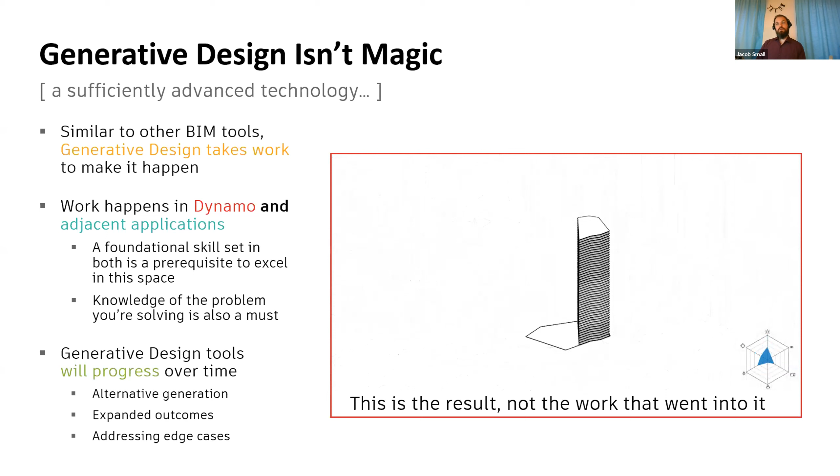So keeping that foundational skill set in terms of how to build and manipulate Dynamo graphs is really, really important because you're going to have alternative generation methods come up, expanded outcomes. Hey, this job cares more about this than the last one that cared about that. So let's figure out how to calculate this thing, and addressing edge cases that might come up.

What if your site is super narrow and therefore none of the offsets that you're using before work because we've got these crisscrossing polygons? How are we going to deal with that stuff? So all of this stuff does take some work.

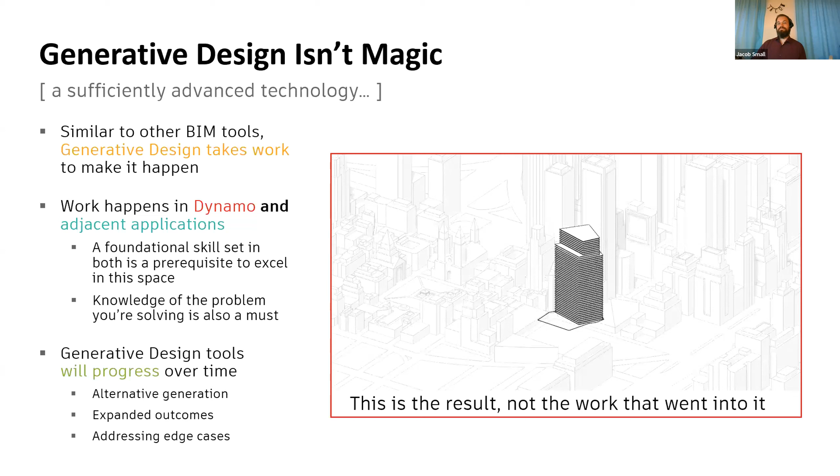But we wanted to make sure that we had an idea about how to get started with a generative process. And that's why we brought Lilli in today. She's an absolute expert in this piece. So Lilli, I'm going to turn it over to you. I'll be flipping through the slides, but we're going to go ahead and talk about how to get started with generative. Great, thanks, Jacob.

I think a couple of weeks ago when the first generative design talk was, I was bouncing around in Europe, did some traveling over there. So hi to my friends in Amsterdam and Germany. I love your cities, they're fantastic. And never been to Copenhagen, but it's on my world bucket list.

So I have a background as an architect, and I have been working on this problem of generative design with Jacob and Sol and others for a couple of years now. I know last session, John gave you a great overview of looking at some problems with laying out some trees and how you could use that in Dynamo Player, and then how you could transition to using that in generative design. I think that was a great intro to these tools.

We'll repeat some of what he went over last week, but we're really gonna go through some concepts on what do you need for a generative design study, and how do you start to go about it? And I would say first that the process really isn't super different from what you might do as a traditional designer, right? So you need to understand the problem that you're going after, define it very clearly, decide ways to measure success, think about how you're going to review the results. And so you're working with people, right? Figuring out what the parameters are for your design problem.

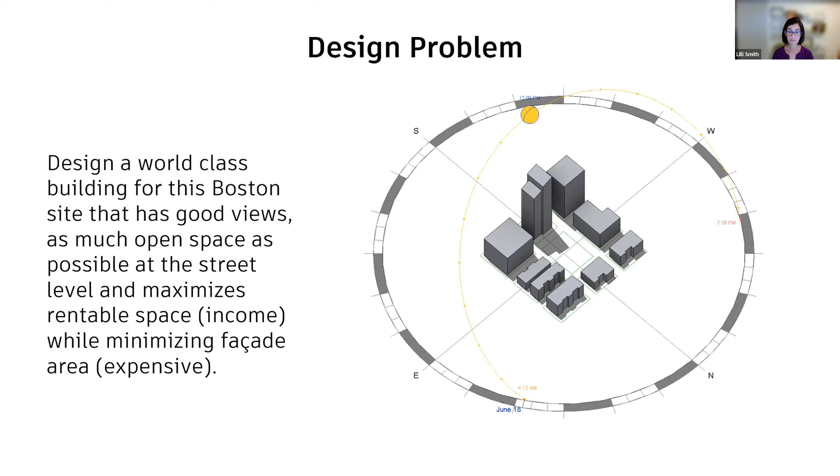And it also minimizes the amount of facade that we have because the facade materials are really expensive. Maybe they are things that have a lot of embodied carbon. We want to minimize them. So that's our design problem. And if you go to the next slide, we've done some work in figuring out how we're going to approach this problem already. And we have a notion of this tower here.

And I'm just going to describe the basic way that we're thinking about how to shape this tower. So we have different parameters that are going to shape this mass in different ways. And this is just a specific design that we came up with because we liked how these angles worked in this site. And so there were some design decisions that we made.

So if you go just one click forward, Jacob, you can see the black line that we showed was the site. Then this is our first idea of the massing, and this blue dot is moving back and forth on the site, and it's bringing it back to make more resultant green space. You can see the green space in the model there on the right. So that's our first parameter. We'll see how that's working in Dynamo.

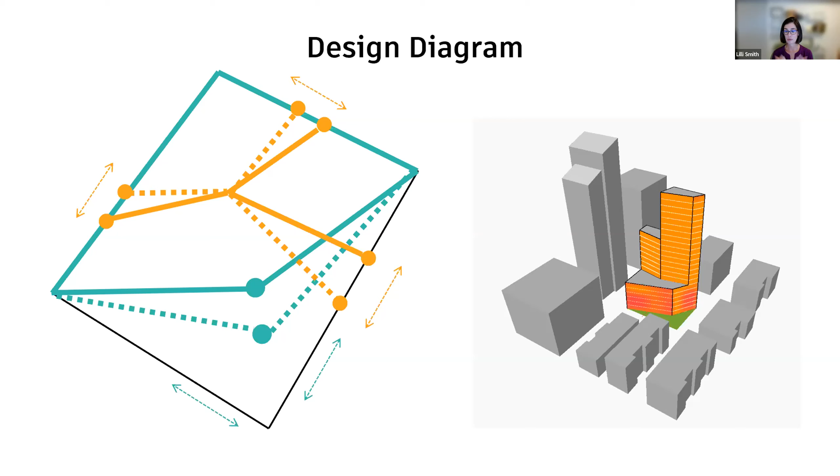And then another layer on top of that is how we're going to split up the towers. So again, we have these points moving back and forth on a derivative of the site lines, and they're breaking up this form into these three towers that are a critical part of our design, and we're going to investigate what we can do with them.

Okay, so these are the summary of our parameters that we're going to vary in the study. So we have the heights of the towers. We have the corner point in the open space that we showed, that was the blue dot. And then the splitting location, the orange dots. And all of those parameters are going to be in our model as inputs.

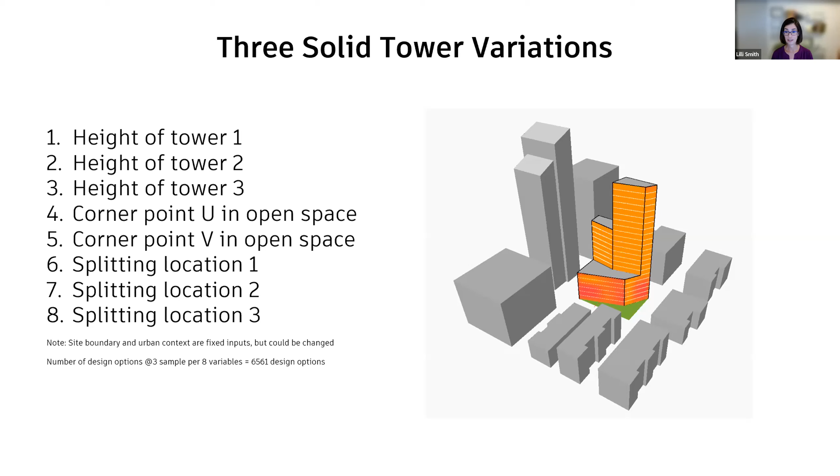But if we take all of these 8 inputs and we just sample 3 different choices on each one of them, that works out to 6,561 different design options. So you can go to the next slide. So we can use the computer to generate a lot of design options. If we set it to more than 3 samples for each of those variations, it would be even more.

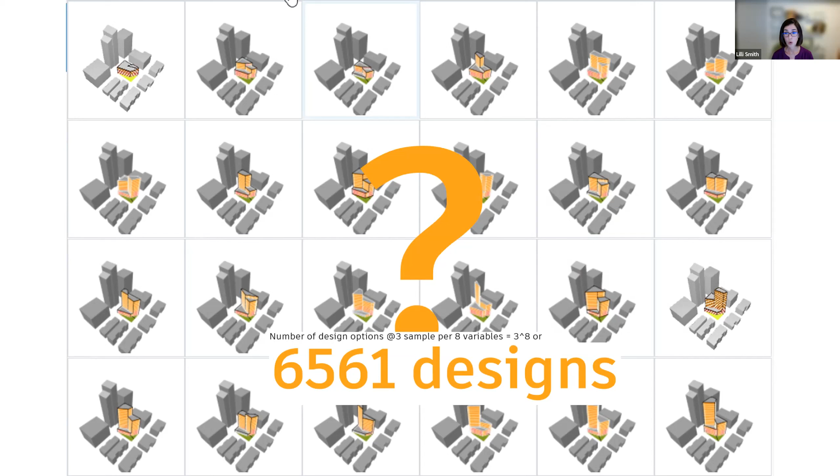But how does this really help us, right? Are we really going to go through all of these, and how are we going to make these choices? So the critical second half of the problem here is that we need to have some metrics, some goals that we can use to help sort through these results. And I would posit that there are really 3 different types of measurements that we could do here.

There's things with simple math. So in our goal of having as little surface area as we can, we can measure that pretty easily in Dynamo, because there's a surface area node that we can measure the surfaces with. We can add them all up.

We can look at the heights and do some analysis with them with some pretty simple math. We can also use more complex nodes, things like solar radiation or some view analysis that uses rays that are going to measure how far it is to a different building. We could use those for more complex analysis.

And then, of course, there's always going to be things that are not measurable that are going to factor into this, such as beauty, personal preference, aesthetic sensibility. And some of those things we have already kind of made design decisions on in how we've set up this parametric model. And we can evaluate the results based on our own designer's intuition after the fact as well. But as much as you can put things into math, it's going to help you to sort through them. And we'll show an example too of how you can try to start to put some of these preferences into math. So yeah, you can go forward, Jacob.

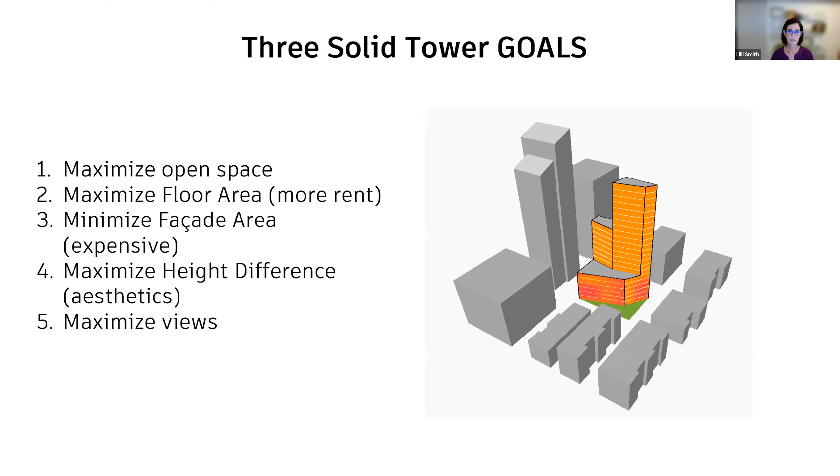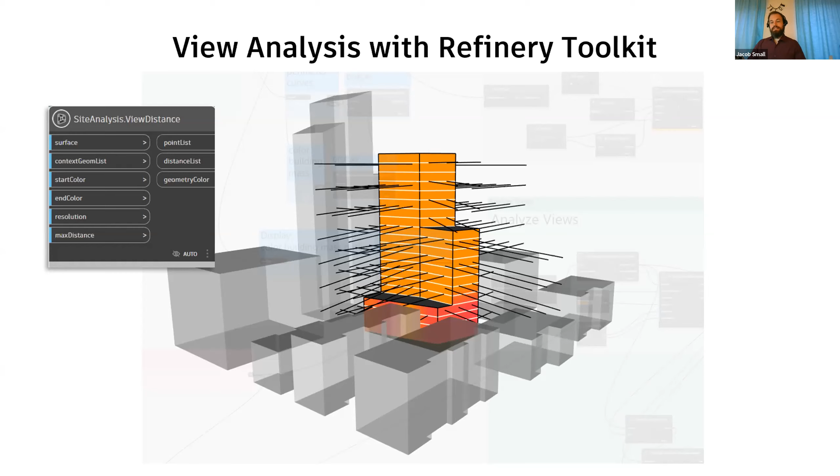Okay, let's see, what's the next slide that we got? Next up, we go to the demo. Okay. Yeah, so cue the danger music.

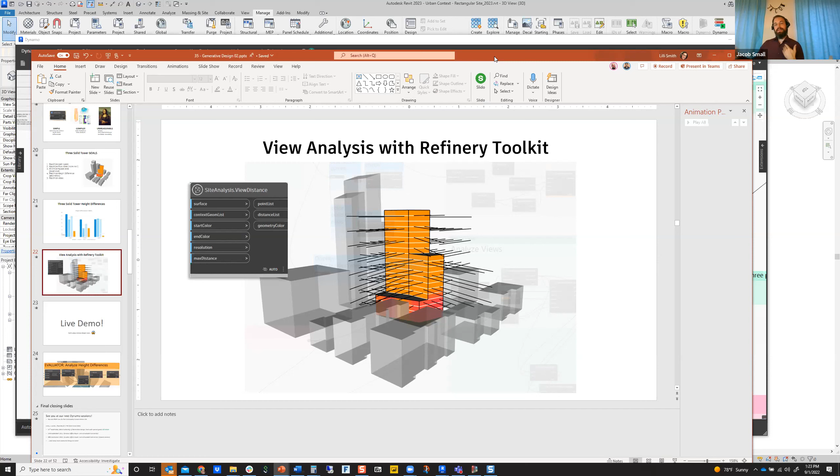And while we work on switching over the screen share, I'll stop my sharing so you can pick up. I just wanted to talk in particular about the view metric, as Lilli mentioned early on, that's one of those more complex evaluations. So a lot of times you wind up having to deal with more abstract concepts in order to make it work. And it really helps out sometimes in terms of wrapping your mind around how that concept is working to do stuff like visualize those vectors of the views from the points to figure out what that means about the view direction from the given piece of the surface. So really glad to see that in there. Great add, Lilli.

Yeah, and so as we go, I'm going to show you this model that we've made and how it works as a parametric model, and then how to turn it into a generative design study, so that you can start to get those 6,000 or however many options, and also how we can measure some of the results.

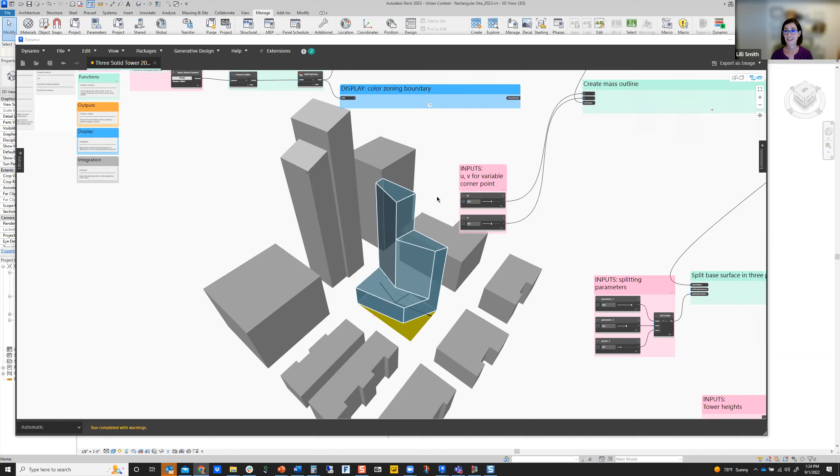So, Jacob and Sol, feel free to jump in if anything doesn't make sense or you want to add color. That would be great.

So the first thing about this model, and I think we can probably post this model if people are interested in trying it out themselves. There's a lot of good learning in this model. You guys can help figure out where to post this.

So the first thing is just to understand what you're going to see in this graph. We have these different sections with different color codes. We like to use pink for inputs. The functions are all in these green groups. Our outputs are going to be in orange groups. We have display functions, so turning on different parts of the model, in blue. And then integration, like writing stuff back into Revit, is in these gray groups.

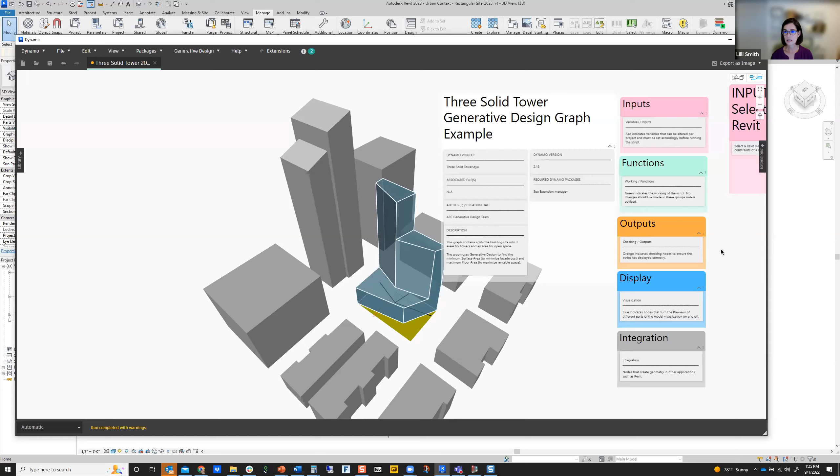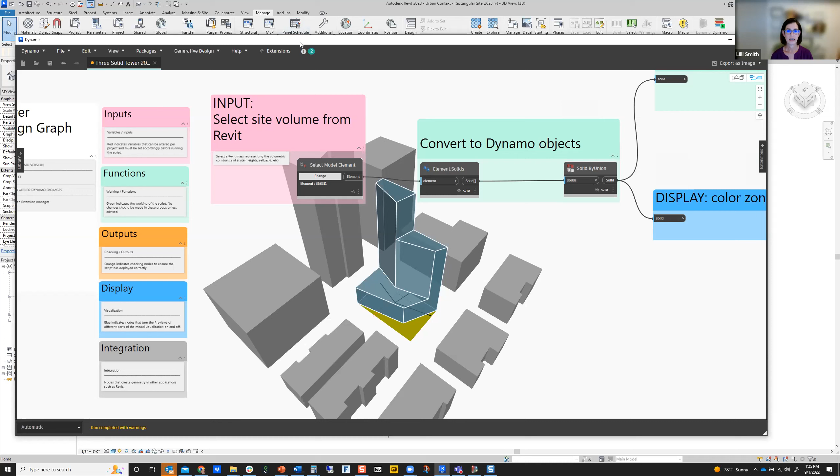Okay, so first let's look at how this parametric model is made. I explained some of it with my silly PowerPoint diagram, but just to show you how this works. First we're getting this site input from Revit. You can see down here in Revit is my site. I built this in Revit because it's way easier to build the site context in a modeler like Revit, and you could just bring it in with one node, pretty easy. It's nice to get a start on this context.

I also built out this thing you can see here in the middle, this zoning boundary. It's like a 3D zoning boundary, and that is coming into our model too. I don't think we're actually using it in this example for analysis, but you could turn that on and use it for, okay, if I start rotating this model or building it certain ways, how much is going outside of the zoning boundary?

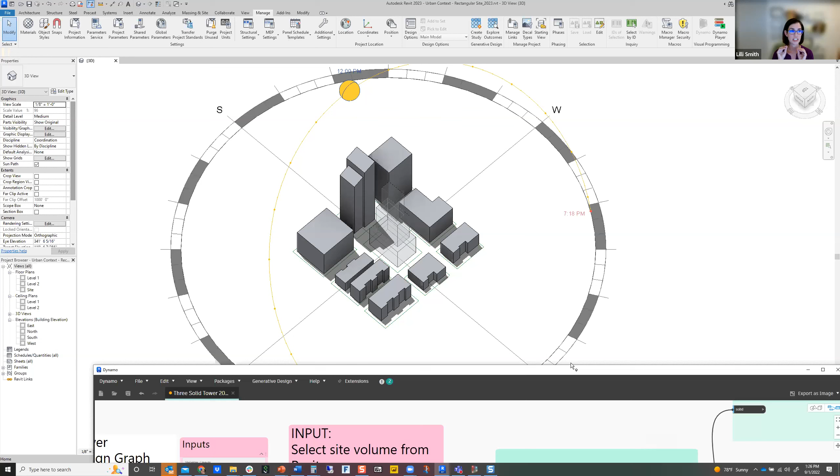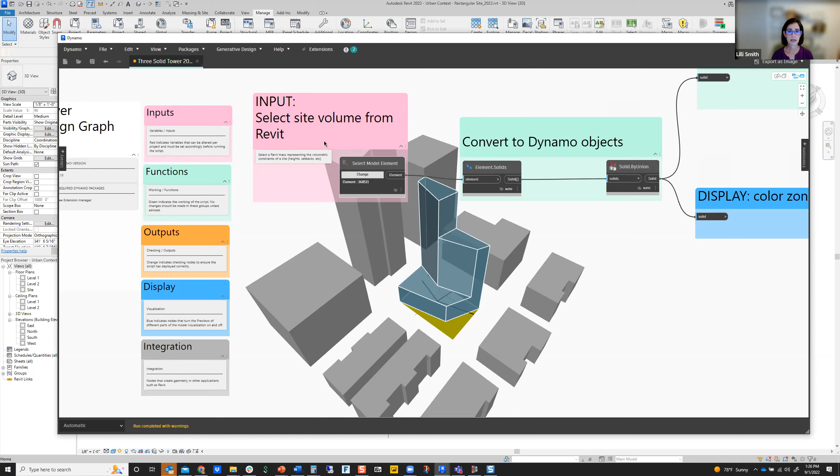So just pointing out that Revit, or something else, I think Jacob has some examples from Civil 3D, starting with your context there and bringing it in can be a great way to get a head start. We're going to use this context in this evaluation too. So we're putting this in a pink node and bringing in all our Revit stuff.

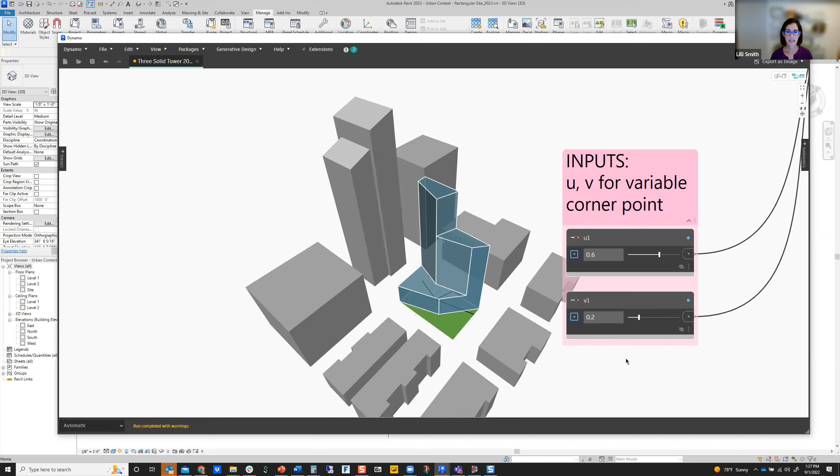So the first inputs I want to show you are this U and V. This is just how this is moving along this polygon that's representing the site, right? So I have my model set to automatic, and if I start to move this in different ways, it's going to move this point out and back, and it's going to change the shape of my building in a controlled way. So that is the first parameter.

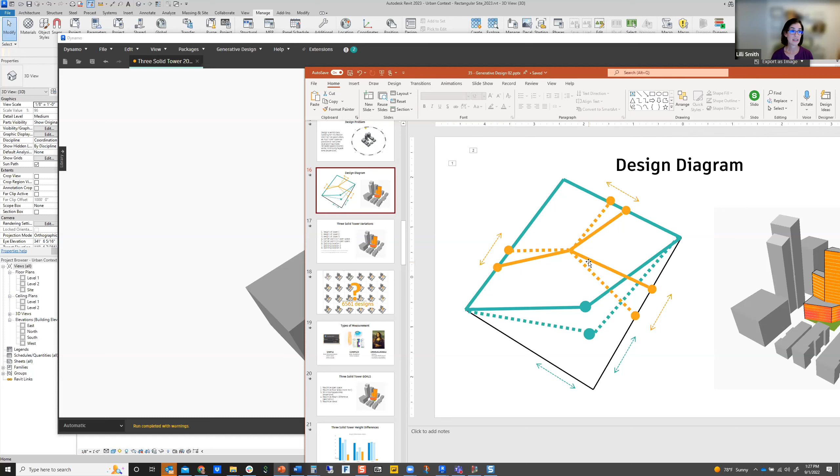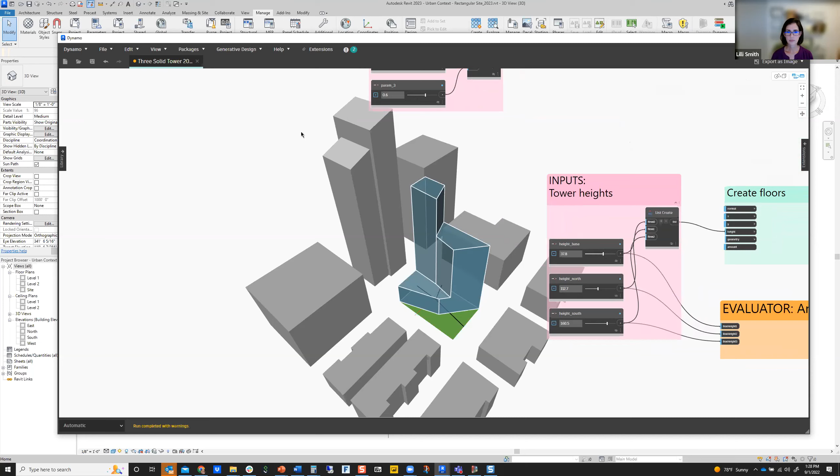And again, looking at our diagram here, that was this first cyan dot there. Now we're going to look at these splitting parameters that we have. Those have 3 different parameters that we can flex again to change the shape of this tower. These are just moving back and forth along the site lines, giving us different forms of the mass.

Now we've seen 5 of our 8 parameters, and the remaining 3 are on these tower heights. This was a design decision: what are we actually going to vary in this study? Varying the height of each of these 3 ways that we're cutting up this form is something we want to study, and what are the implications of having a lower tower on the north or a lower tower on the south? What are those going to give us in terms of our goals?

One important thing to point out here is that the range setting is really important when you're working with generative design. We can set a minimum value, a maximum value, and a step, or how much we want it to change between clicks. That can really help our design space to be smaller. If I set this to 1, I'm going to have 10 times as many possible changes in this range as if I set it to 10, right? But I want to set it to 10 because I want 10-foot floor to floor.

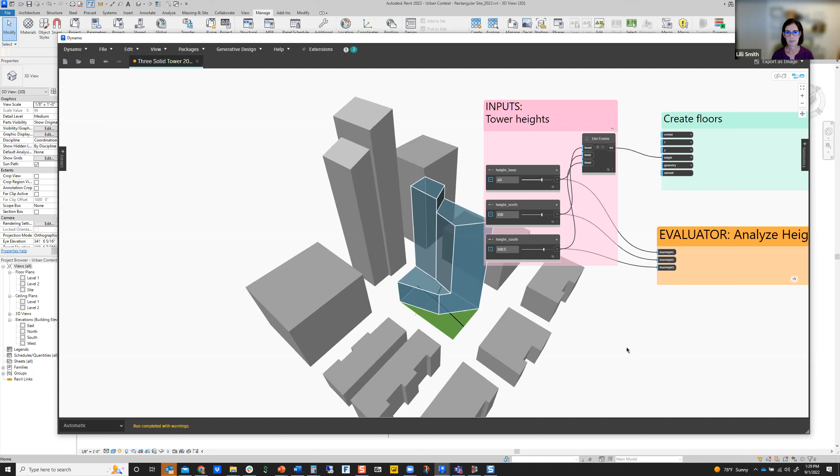So, okay, that is our inputs. Anything I forgot, Jacob? We're going to show how to set these so that they are registered as GD inputs in a minute. No, I think that's pretty good.

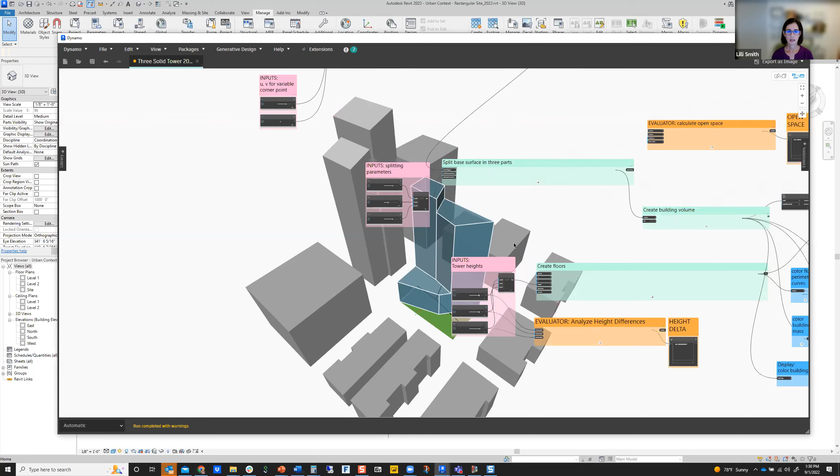The one thing that I would want to add at this point is we're sort of hiding a little bit of the work, in that the nodes doing the actual creation of these bits of form are in these collapsed groups, which is a function of Dynamo 2.13. So if you're trying to follow along at home in Revit 2022 and things don't quite look like this, it's probably because you're in the older build, so you'll have the gray nodes instead of the black, and you won't be able to collapse your groups to hide the big effort of all the different nodes that have to be placed.

Again, this is looking at things more from the what do we need to know to get into generative, as opposed to how do we combine the nodes to get those results right now. Yeah, thanks, Jacob. So yes, important to point out, I am using Revit 2023.02, I think, which is the latest Revit, and it has Dynamo 2.13.

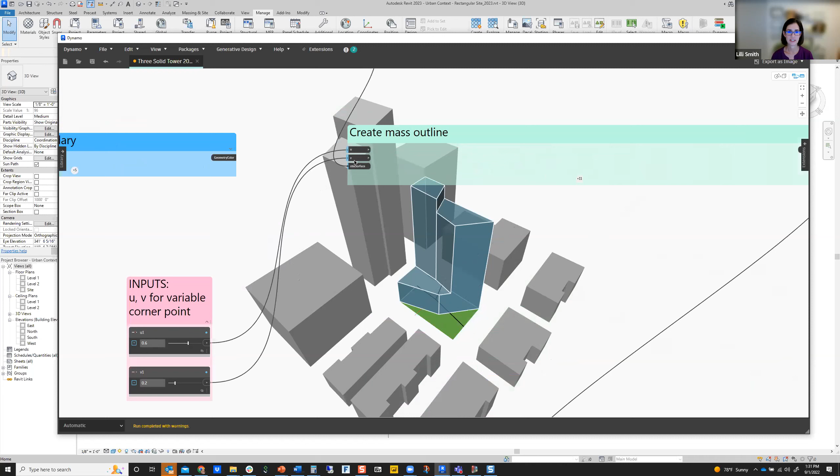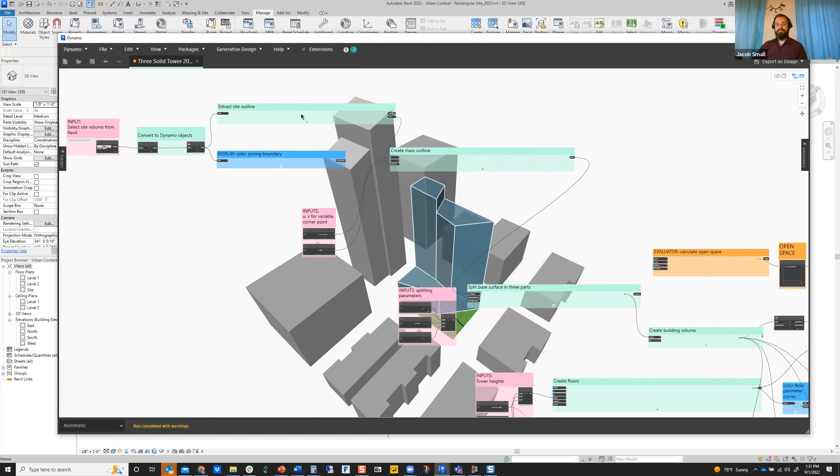And yes, I love these collapsed groups because, look at this, it's less scary with everything collapsed up. Or you could say it's more scary because you don't know what's going on. But it gives you really simple views of what the inputs and outputs are. You don't have to worry about everything inside until you want to. So these green boxes are doing a lot of the work: getting the site outline, creating the mass outline, splitting it up, creating floors and the building volume itself.

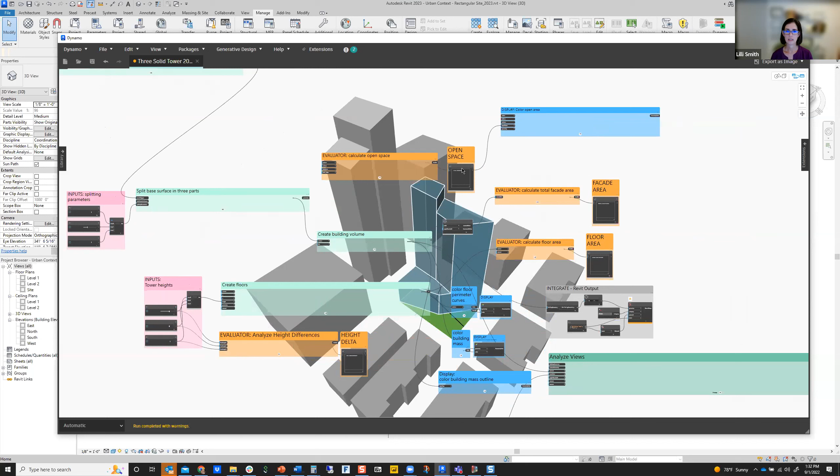Okay, so let's talk now about how we're going to have this evaluated for our different goals. These are all in these orange nodes here. To look at one of the simpler ones, let's look at how we calculate the total facade area. We can open this up, and I try to label things so that when you open this group, you'll understand what's coming into here.

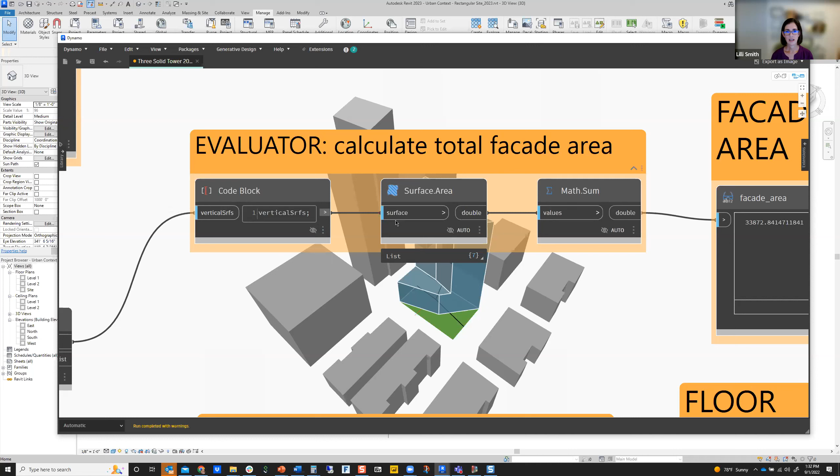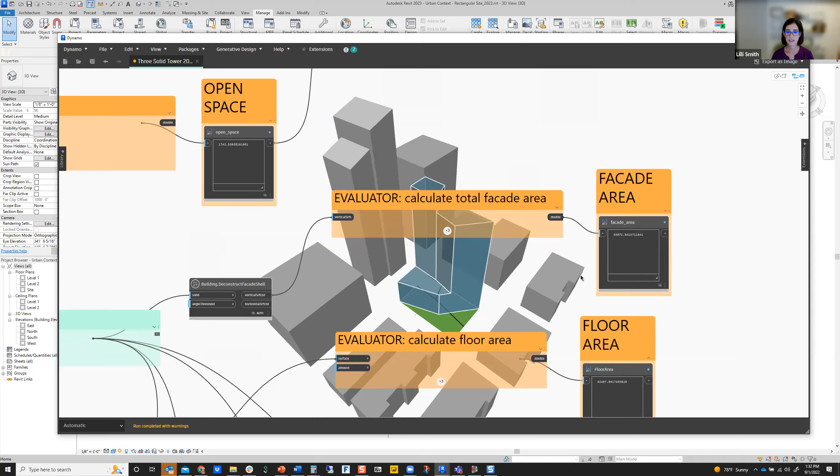Only vertical surfaces go into our calculation, and then we're simply using this surface area node to get a list of all our surface area amounts, adding them up, and that's our facade area. So that one is pretty easy. Calculating the floor area is also pretty easy. We just have to divide it by the floor-to-floor height, or into the number of floors we want, measure the area again and add them up.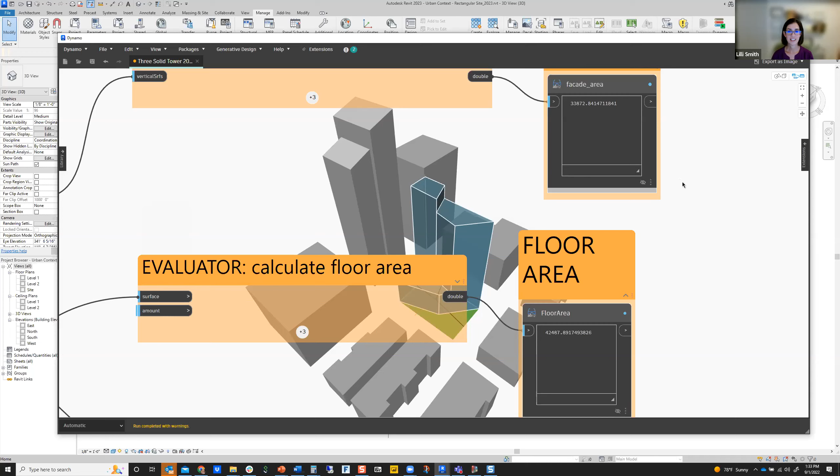When we're preparing this for generative design, we need to put the measurement of interest, in this case the facade area and the floor area, into a watch node that will show up in our generative design study. And we name it so it shows up in the generative UI. The same way, inputs like renamed sliders or number inputs show up with the name of the node in the generative interface. We can see that in a few minutes.

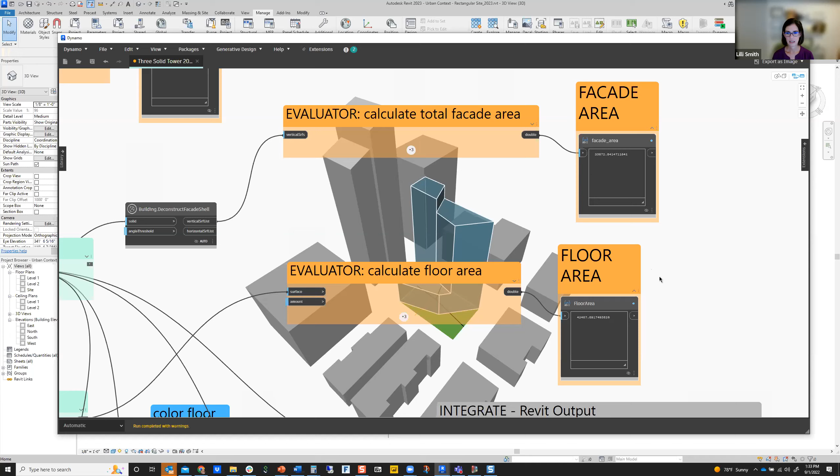Okay. I was going to show you how to build out the height differences, but I'll show you that a little faster because we're tight on time. I want to get to actually running it in generative design. It's not a generative graph now, but we're going to change it into one, run it, and see some options.

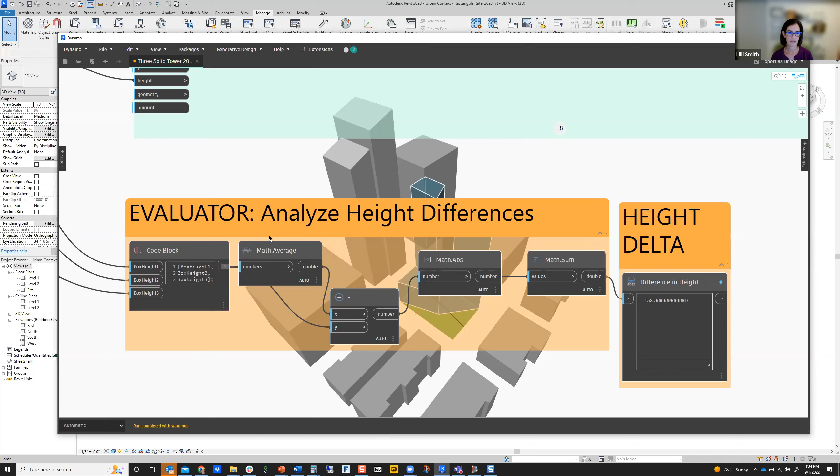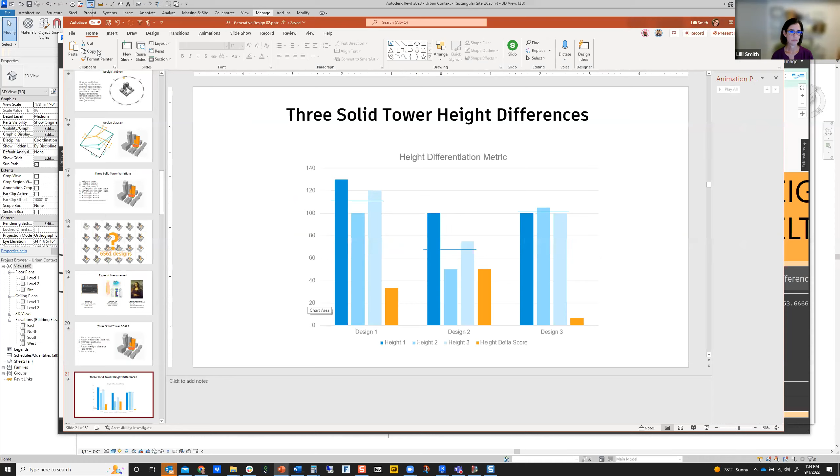So this is how we are evaluating the height differences. We're bringing in the heights of all these towers, and as I explained on this chart here, we're trying to measure the deltas between the heights and then compare them. So we're using some pretty simple math nodes. We're getting the average of all of the heights, so you can see that here.

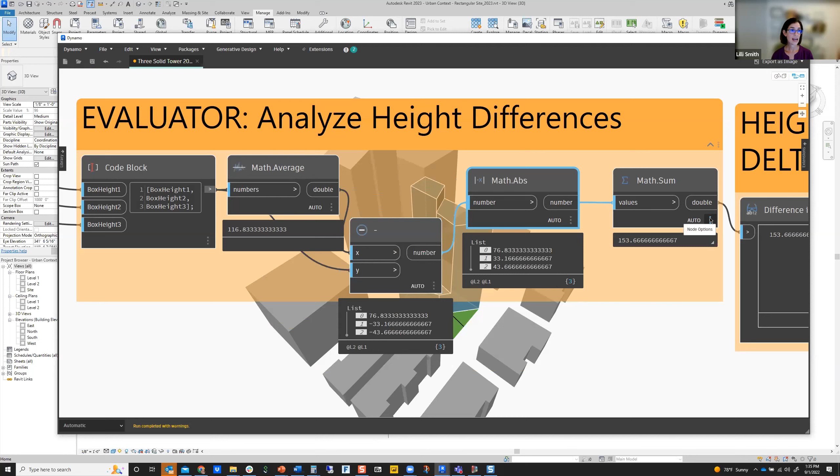And then we are, if I get this to go down, taking the difference in those operations, and setting the absolute value so we don't have any negative numbers, and then adding up those differences, and that's going to result in this difference in height score. And again, this is just one way that we're trying to have some of our aesthetic choices be turned into something that we can measure with numbers.

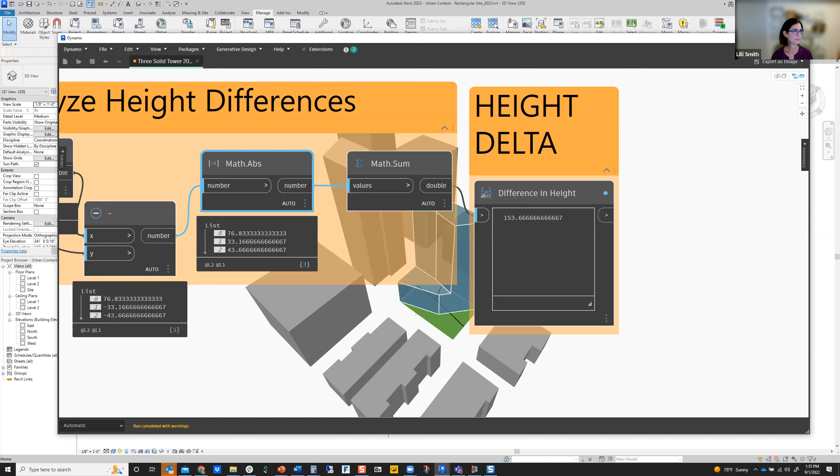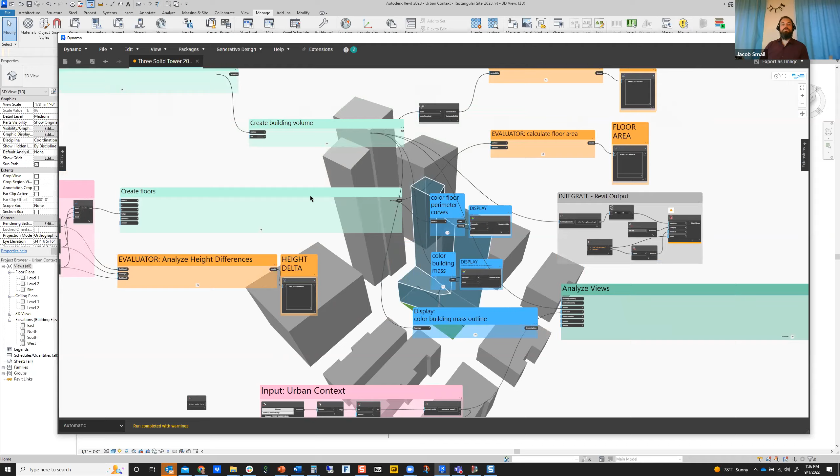So we have a watch node here that we are going to be able to keep track of in generative design. Yeah, and that idea of taking the average and finding what the sum of all the distances from the average is, is a very useful one in evaluating all different sorts of things. I was actually looking at what the best route for a roadway or linear structure, a pipeline, let's say, through a landscape would be. And that applies there as well as it does here, because you don't want too much variation in those surfaces, right? Unless you're designing a roller coaster, in which case you want to maximize that value. So all sorts of reasons to get into that.

Again, it's still math. It's maybe more complex math than just what's the area of all the vertical surfaces summed up. But you're going to spend a lot of time when you get into generative figuring out ways to do that, as well as trying to bound stuff between limits, right? Because if we've got values that are all over the place, we might really skew some of our outcomes as a result of that. But back to you, Lilli.

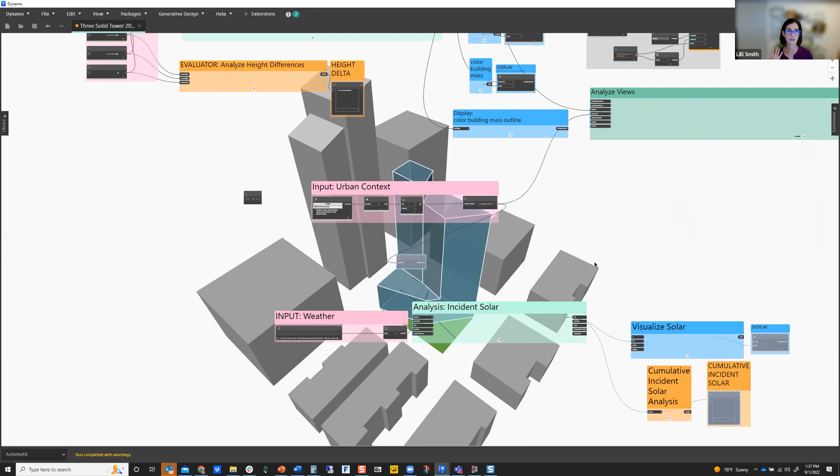Yeah. So I actually have another branch down here in this graph that talks about solar radiation, and I'm not going to show that today. I actually have it frozen via this node, because it's a little bit slower for my demo purposes. But if you want to investigate this, you can totally turn this on. It's not that slow, and you can also use more sophisticated solar analysis in your study as well.

Okay, so now let's look at how we're going to convert this. We have our parametric model, we have our varying degrees of sophistication ways to measure how our designs are doing. And now we want to turn it into a generative design model so that we don't have to sit here and move these input parameters manually and just keep track of the results somewhere. It's a nice thing for the computer to help us do, right? So in order to change this into a model that will work with generative design, we need to tell it first that it's a generative design model.

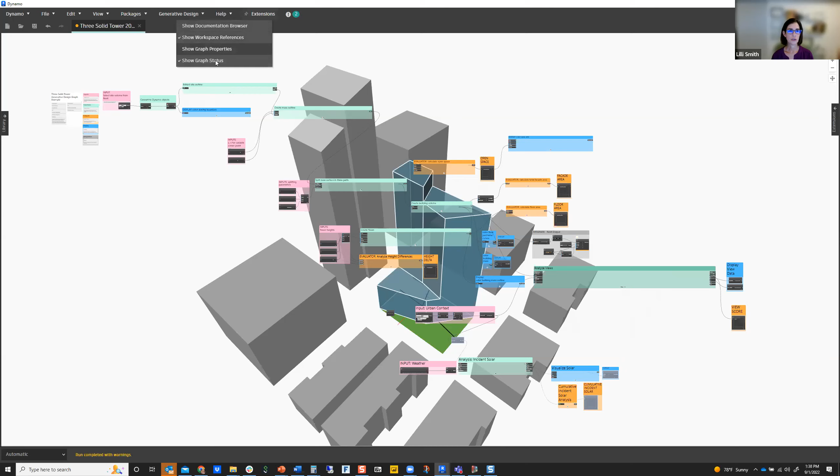And if we go to graph status here. Let's see. Oh, sorry, graph properties. Wait, no, graph status. I had it right. It just turned off instead of on. It was already open and I didn't see it. Sorry. Okay, so graph status here. This is new to 2.13, Sol, or 2.12? 2.12, I believe. Okay. So we don't have a lot of types in here. We only have generative design and none.

But this actually is some functionality in Dynamo that has an API, so if you want to write rules for your graph, you can take advantage of this. We made it in a way that was open for other people that wanted to write rules for how Dynamo graphs should be. You can enforce them using this functionality. So we're going to set it to generative design, and it's going to tell us how our graph isn't meeting the rules for what is a generative design graph. And the first thing is that there haven't been any input nodes set. So we have to have inputs and we also have to have outputs.

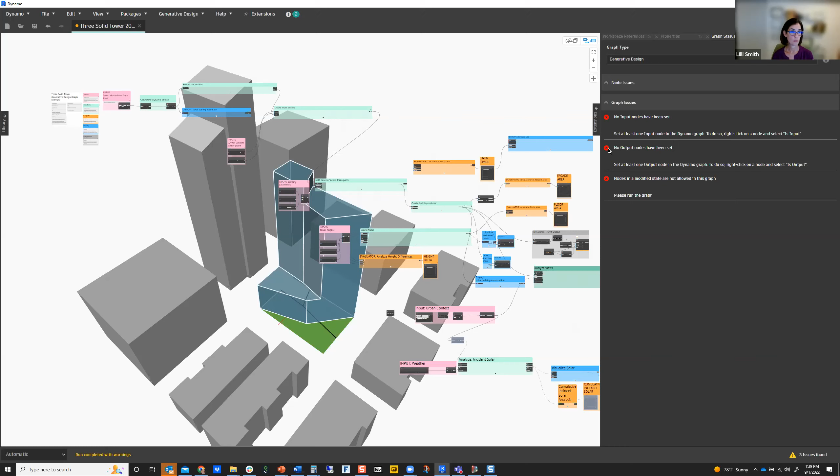So I am going to go in here and change all the inputs that I want. I could have the Revit volume that I'm selecting as an input and expose that in the study so that you'd have to choose that in Revit every time. But for this purpose, it doesn't need to be variable in this study. I'm going to focus on setting other things, so I'm just going to leave that to be not an input. But all of these 8 different inputs that I said I cared about and were part of my design decision in making this study, I'm going to turn those on to be inputs.

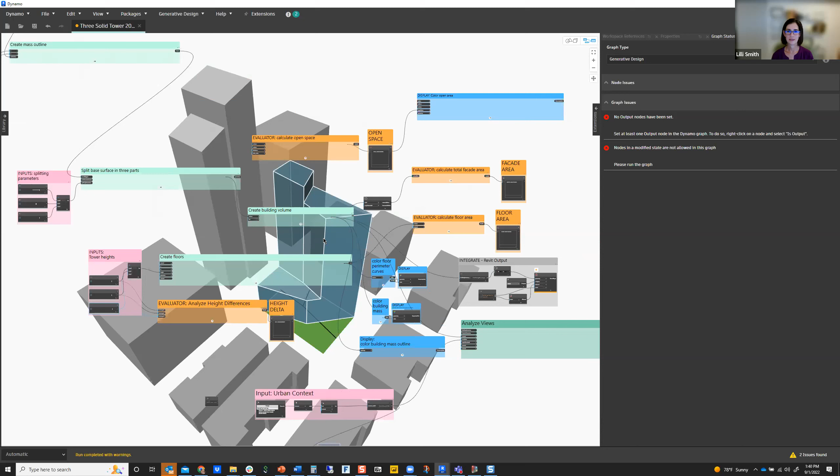If there's a better way to do this than one by one, please y'all tell me, but you know, good to think about them, making sure everyone's done. But so, okay, so I have satisfied the input requirement. Now I need an output requirement.

And I'm not going to do the solar, but I'm going to have the height delta, the open space, measuring my green space here, my facade area, and my floor area. So I'm going to turn these all into outputs. You can see that little warning went away, but there's other warnings that are cropping up here. Take a look at those in a minute. So, okay, so that gave me all of my inputs and outputs are set.

And spoiler alert, when you get to 2.15, I think there is a graph node manager. You can see it right now if you go to the sandbox version, and it's going to be able to tell you what all your inputs and outputs are in the model, in one place here, which is really nice. But I don't have it in this version yet. So look out for that.

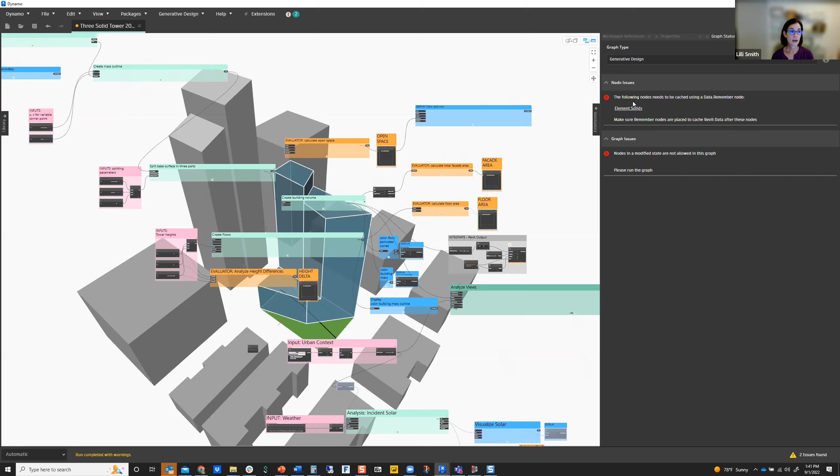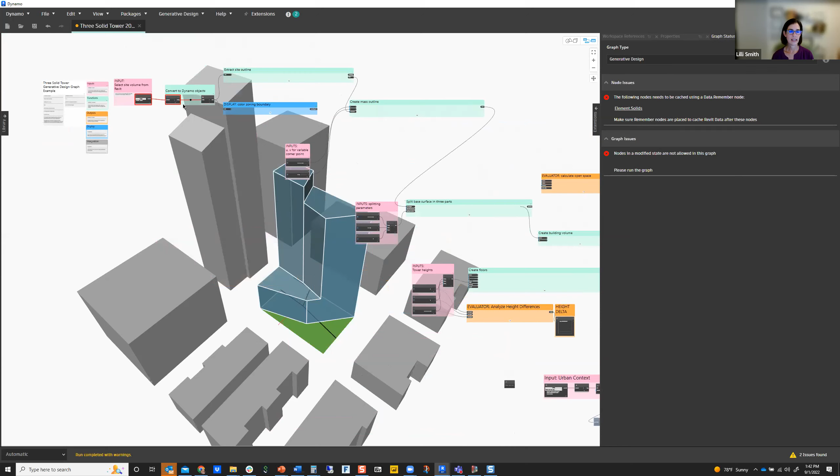But okay, so there's some other issues here that have cropped up, and it says the following nodes need to be cached using a data remember node. So what that is telling me, and it's giving me some graphics here, is that stuff coming from Revit is not going to operate when you're running this model kind of over and over in a separate environment, as Jacob was explaining earlier, right? And so we need to cache that information into the model, and it's telling me exactly where I need to do this.

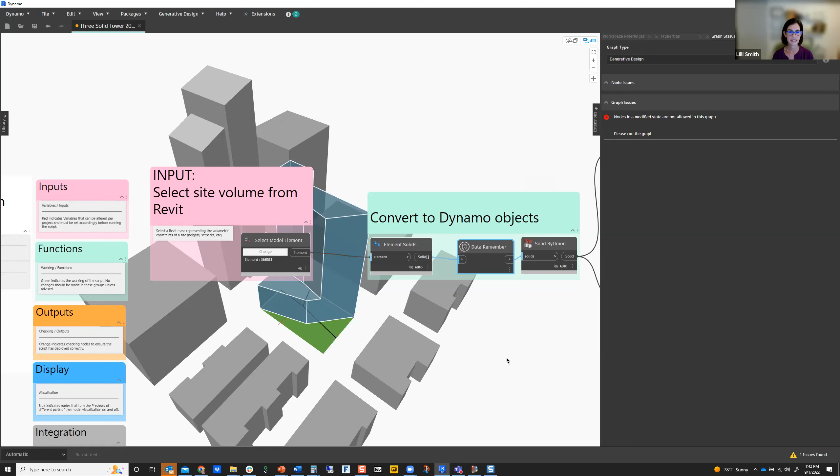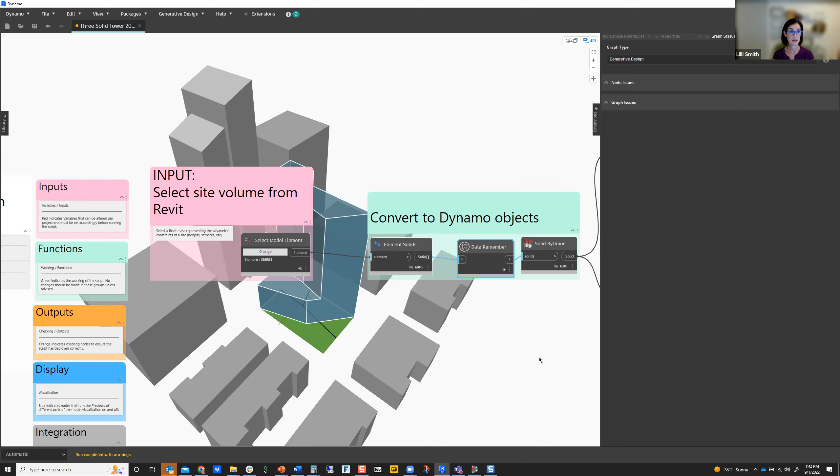So I'm going to come in and press this plus button, and it's going to put in a data remember. And it's also going to bring in this big 3-dimensional site boundary outline that I had in Revit. I'm just going to turn the preview of that off. But now it's going to be in there, because nothing would work in terms of my building geometry, since I'm making it all off of the site, without that.

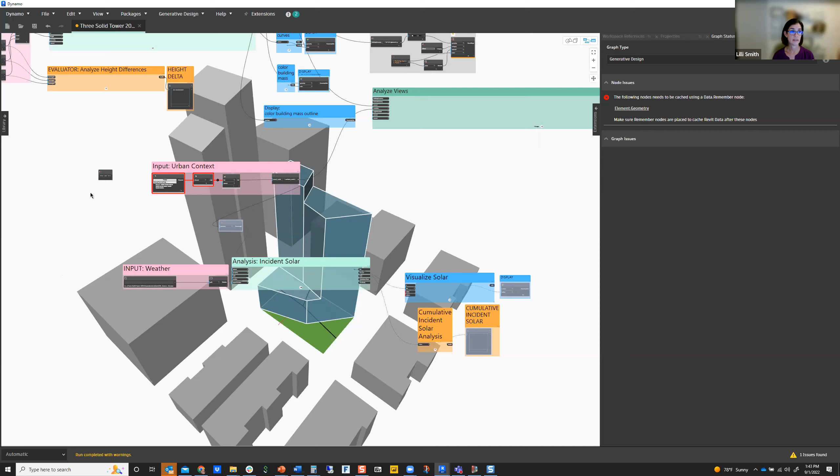And I think actually, why is this one not working? Oh, there's another one, this view score over here that needs to be an output. And so there's another data remember node that we need for this context. So we're going to bring in this context to do our view study, and we could use it for solar radiation as well. So we turn on that branch, but we also need to bring in all the geometry of this building that we've built in Revit and cache that in the model too, so that will work better. And we can also just turn off that preview.

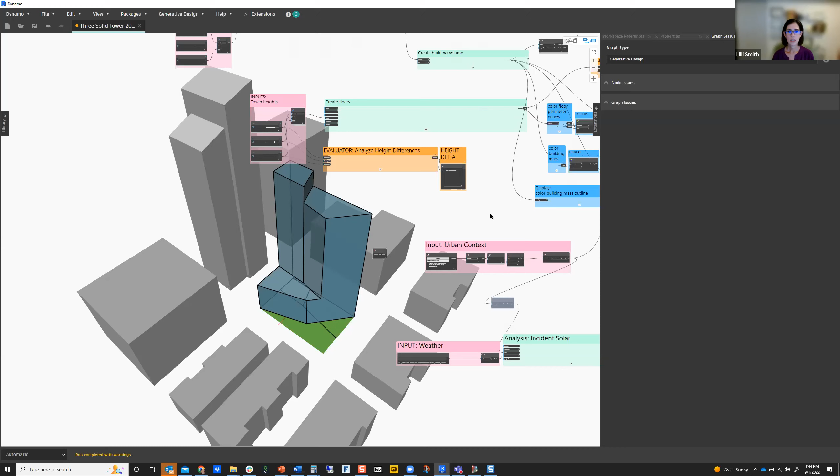Okay, so we have set all of our inputs and outputs. We have fixed our remember nodes. There's one other thing that the linter, that's what we call this generative design rule thing, will do for you. This gray box here is writing data back out to Revit. So we actually have a branch of this graph that when we make a decision and come to certain parameters, we can actually put this mass back into Revit and go from there. But we don't always want to be writing to Revit, right? Like after every iteration, because that would just be mayhem for 6,000 iterations.

So we have something called a data gate. And this basically controls the, we have a button in the Explore Outcomes UI that says create in Revit, and this data gate is hooked up to that. And so if you leave this open, it's going to tell you that you should have it closed, so we don't have total mayhem in the model. So we're just going to leave that as closed.

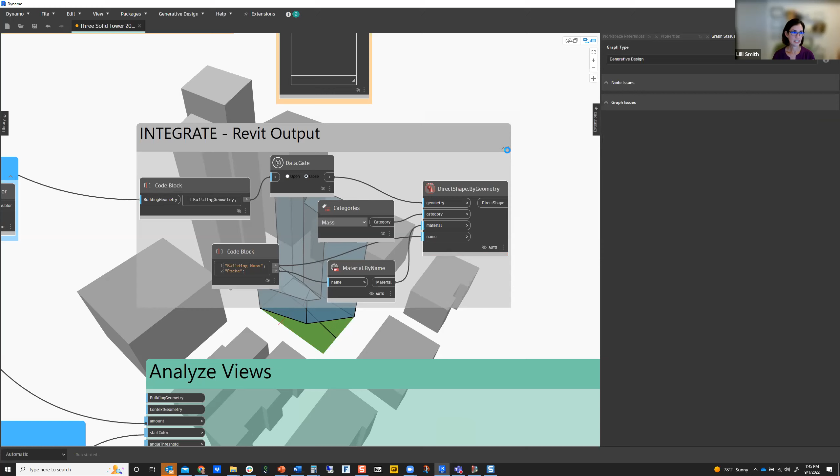And so our workspace references extension here has been very helpful in getting us to make this into a generative design model. One other thing that it's doing that I'll show you, sorry, I don't have my folders set up totally well here, but okay. When I save this as a graph type generative design, it is making what it calls a dependencies folder in here. And this contains all of the packages that I'm using in here, like the refinery toolkit.

And it has any necessary files, like the weather for Boston is actually something that's being referenced in there, that it's packing up for me. And then definitions, I forget which that, oh, that's if I had any custom nodes, they would go in there. And yeah, it's custom nodes that aren't in a package already. So DYF nodes that are not packaged.

The reason we did this was because we wanted people that didn't have all this stuff installed on their machine to be able to use this in their workflows. So if I give this file here that I'm working on, this DYN file, which is now set to have all of its generative design qualifications, and this dependencies folder, if I give that to Sol, he's going to be able to run it even if he doesn't have any of these packages installed. And yeah, it's pretty handy to be able to use that.

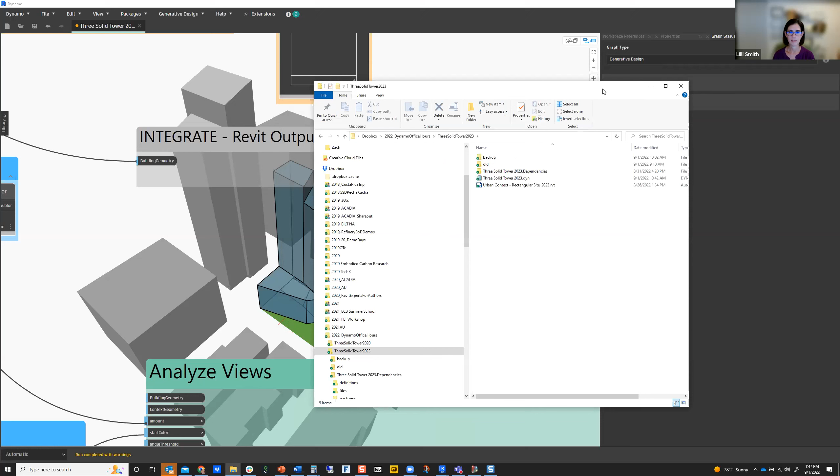It will prefer packages, if you're just using this in Dynamo and you have all these packages installed, it'll use the ones that you have installed. It'll also ask you if you open the script in Dynamo if you want to install the missing packages. So that works, and we can talk about that more if people have questions. But that's another kind of nice thing with having this graph type generative design.

Okay, now I think we are ready to try to do a test run of this. So first we're going to save all of our changes, all of our input and output changes there. And, okay, that was scary. But we can actually run this right from generative design, right from Dynamo. We don't have to go into the Revit interface. And actually, if you have an AEC collections license, every Dynamo for Revit will have this already set up, ready to go. So you can create a study here. The only thing it won't do is let you select stuff from Revit.

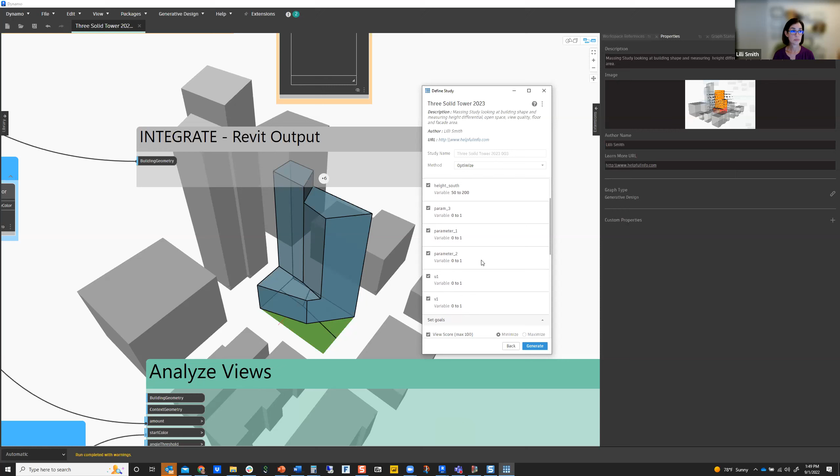I forgot to show, we've also added a description here in the properties and this little thumbnail, author name, and URL with more information, so that when this comes up in this create study dialog, it's a little bit more friendly. You know what it is and something about what it's going to do. Then we can set our inputs, and here we can see all of our inputs: our height base, our north tower height, our south tower height, the splitting parameters. Maybe I could give those more intelligible names, but they are what they are right now. And then the corner of the site, this point parameter here.

So these are all checked, which means that they're going to vary. Now, when I'm in here, I could also make a decision that I want the base to just be what it is. So I'm going to uncheck this, and I'm just going to keep it at 40. And so that's some of the level of decision that you could make when you get to this stage. You can do a lot of messing around without necessarily having to go back and open up Dynamo. But I'm going to turn that back on because I said I wanted all those things to vary. And I'm actually just going to start by doing a test run to make sure that this is going to work.

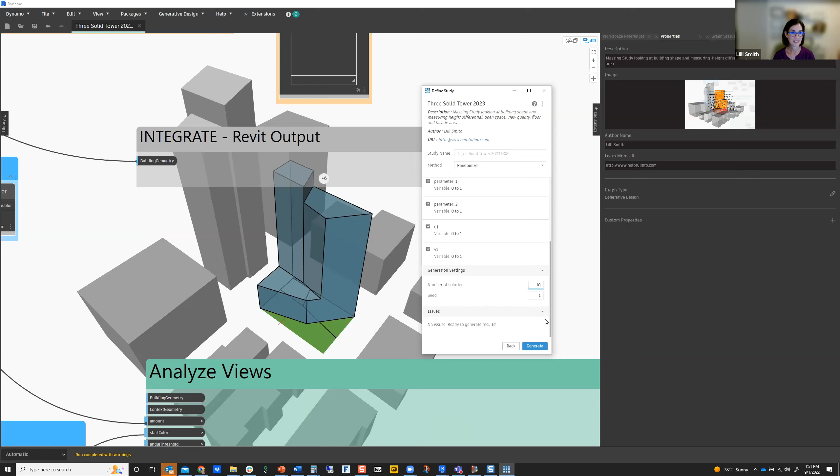We've tried to explain these generation methods a little bit better. We have 4 different generation methods. And the one I'm going to choose first, just to test my graph, is randomize. Instead of having to set all these goals and number of generations that I want to go through, it'll just let me set a number of solutions that I want to come up with. And for demo purposes, it's nice to be able to set it a little lower. And I can just kick that off. Oh, I always forget to change the name of my study here, but this will start to generate options for us. And go ahead, Jacob.

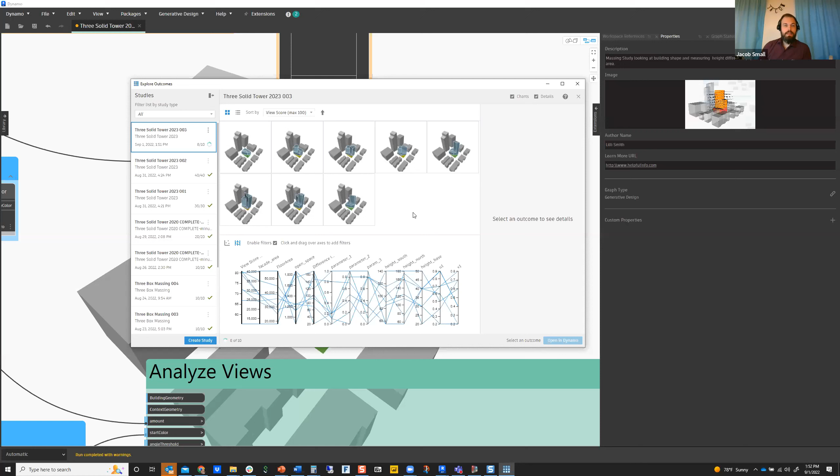What's happening in the background right now is Generative Design is spinning up 6 concurrent instances of Dynamo in a headless environment. So you've got that REST Dynamo core instance that would show up if you were to pull open the task manager. And those are going to keep cranking out results until it hits that cap that Lilli put in there at 10. So we're going to see results continue to run through. I think we've got 2 more coming as it finishes out.

But to Lilli's point, the one thing I did originally unmute myself to say, don't forget to rename it. Oh, we hit the button too quick. I do the same thing like 6 times a day, only my studies are not like a quick run of 10. It's usually like 100 by 100. And so I'm stuck twiddling my thumbs waiting for it to finish the first thing so I can. Yeah, we really need to allow renaming this. Like, it's terrible. But I think we should probably get to questions.

Are there questions? There are no questions in the Q&A at this time, and there has been some stuff going on in the chat, which has been pretty good, talking about linter rules and stuff like that, as well as a few things about making no purchasing decisions around future deliveries and stuff like that. But yeah, there's nothing at the moment.

Oh, is there a way to change how many simultaneous Dynamo instances run? That's a great question, Lilli. Many people have asked for that, and we do have that control, obviously, in our development background, but we haven't exposed that as a user settable parameter. So no, we don't, but it's something that would be cool. And some people want it for just setting it to one instance so that they can run a program that has a license that only allows you to run one thing at a time, like Robot, I guess.

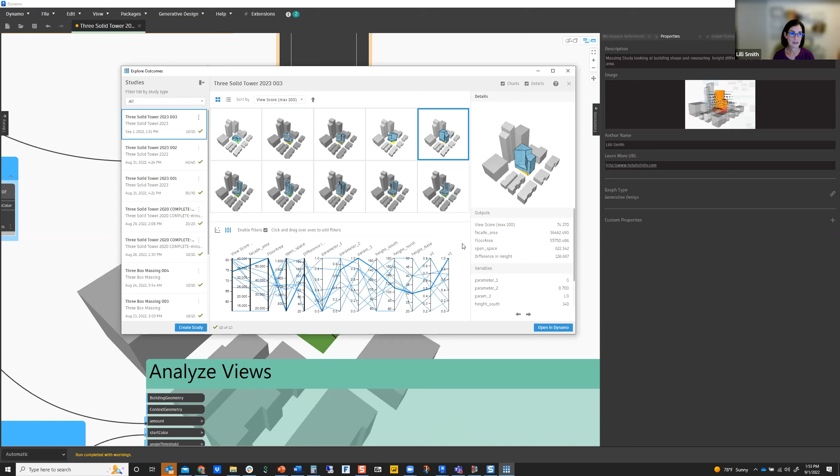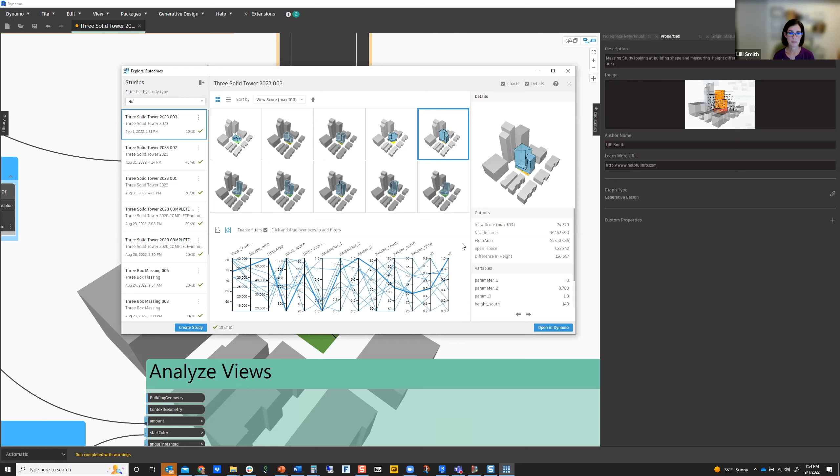Or they don't really care how long it takes. They just want to use that tool that will only let them run one instance at a time. Or people want to run 25 at once and speed it up for really big studies. Awesome. Yeah, good point. The other time I've seen it is if you had a crazy custom node where you wanted to run parallel optimization on that one custom node to get that one result faster, and having to rewrite that node for generative design versus non-generative design is beyond time consuming, if I'm being honest. So being able to turn it down would be quite nice.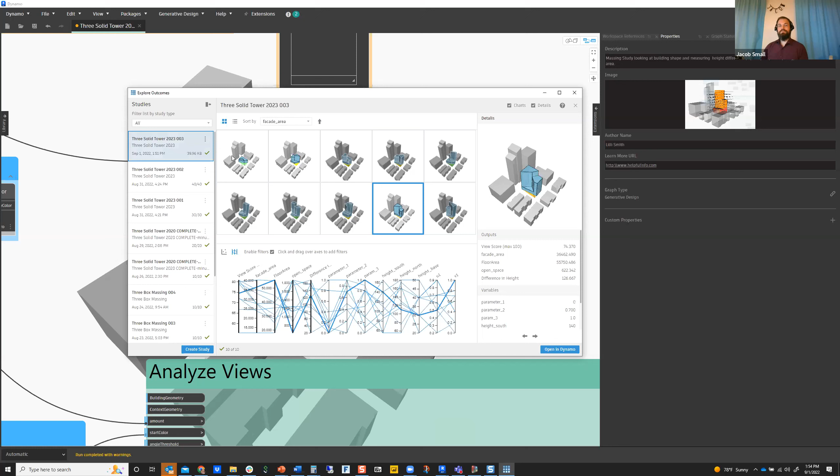Next question, again from an anonymous asker. What infrastructure is there for debugging during generative design runs? Is there any kind of a console or anything like that, like if I stop getting results? We don't have a lot of tools, maybe you know more, but this is finished running now, but I think it has a pause button here when you're running it. Obviously you can look in Task Manager and see what's going on. I don't know, Jacob.

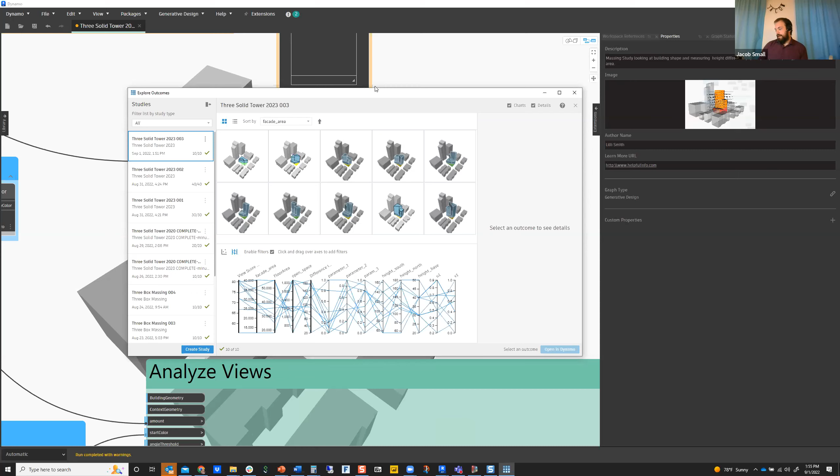Yeah, I can talk a little bit about that. There is a log that happens anytime you kick off opening generative design. A lot of times I'll see I opened generative design and then did nothing, and it just says, "Yep, generative design's open," every 6 seconds or something like that. But in any case, there is a log that you can look into to see if there's any kind of bigger issues. A lot of stuff will be exposed there, like if the server's not running because there's some kind of antivirus thing blocking it.

The other key piece for debugging: Lilli's been doing everything in the context of Revit, but generative design is going to run in the context of Sandbox. That's why we have to remember that Revit data and stuff like that. So it often helps to just open the graph in Sandbox and see if you get results there. A lot of times it'll be instantaneously like, oh, duh, I missed a Remember node there. And then you can go back to your Revit environment, put that Remember node in and get your results.

Because while the linter does catch most of those issues, it's not necessarily going to catch them all in all cases. So the capability to find out, oh, I did have a call to the Revit API buried deep inside this Python node that the linter didn't catch, or whatever it might be, can be really valuable in the Sandbox context. So I always recommend, once you start getting into generative design, install the matching version of Sandbox. You want to make sure you're using the same version in Revit as in Dynamo Sandbox, because things run a little bit different. You might have different nodes available or different stuff happening under the hood, but put those on there just for debugging purposes.

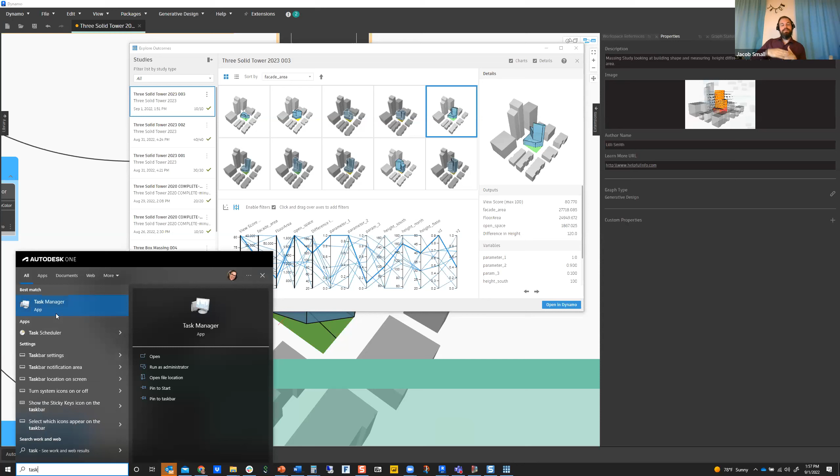And then one more question, because we're down to the last 4 minutes. Are the generative design calculations dependent on the CPU or GPU, Lilli? I don't know, do you know? CPU, yes. Yeah, and again, if you pop that open with Task Manager, Barry, when you're running the graph, you'll see your compute spike to 100%. And if you go into the details tab, you'll see REST Dynamo core instances popping up like crazy as you go along.